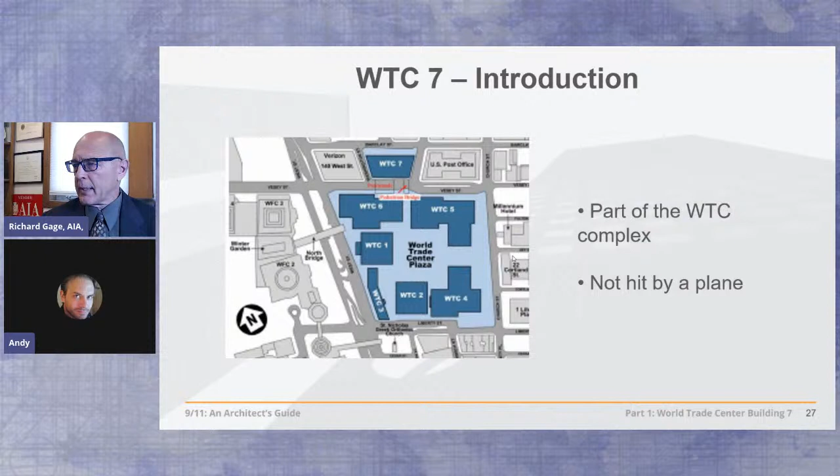Each floor was an acre in size. It's part of the World Trade Center complex officially, just outside the super block of the World Trade Center, as you see here. It was about 100 yards north of the North Tower, let's call that northeast. And you can see it still standing here even after the Twin Towers came down.

It did have some damage attributed by NIST to have no significant impact on the collapse of the building. We'll get into that, but let's take a look at the collapse of this building now, and then we'll get into its details.

The east penthouse collapses first, and that's the mechanical penthouse. In 6 seconds after that, the entire building comes straight down into its own footprint, as we'll see. So we're going to break this down.

First, let's look at the official story as promoted by NIST, the National Institute of Standards and Technology. Here's Shyam Sunder, the project leader: What we found was that uncontrolled building fires caused an extraordinary event. The collapse of World Trade Center 7 was primarily due to fire.

Fires like these that are actually few and small and scattered, as you can see. These are the only photographs and videos that we have of these fires, and they are problematic for the official story.

They show these fires in that area because that is their main hypothesis, as we'll see. But they also acknowledge, ironically, that fires didn't persist in any one location for more than 20 or 30 minutes, which is the conventional thinking of fire protection engineers, borne out by tests. That directly conflicts with their fire simulations.

Also conflicting with their simulations is the reality of the fires themselves, which are shown to be burned out on the 12th floor, the area of concern for NIST, by 3:50 p.m., more than an hour and a half before the collapse. So we have done our own fire simulation at AE911Truth, which shows the fire burning at 2 p.m. in the southeast section of the building.

Then moving over to the north section as shown by the photographs, and then moving on by 4 p.m. to the west end, also shown by the photographs. By 5 p.m., more than 20 minutes before the collapse, there is no fire on this floor at all, as shown in the photographs as well.

So this is only the beginning of the problems for NIST that they have yet to answer to.

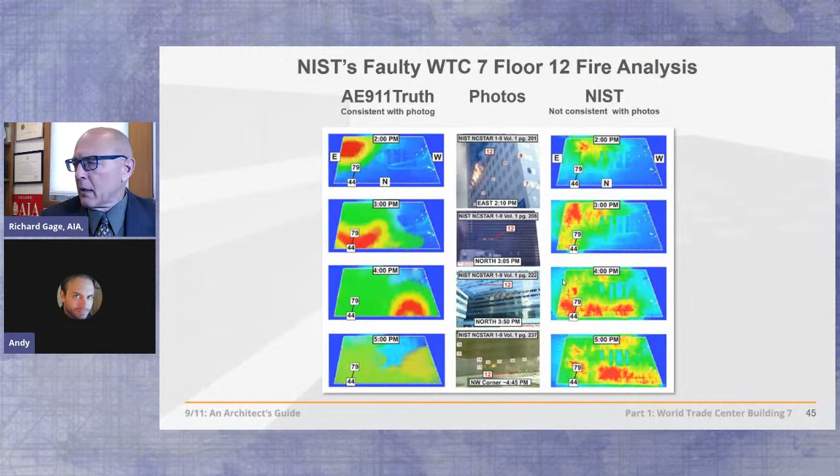Our study has identified thermal expansion as a new phenomenon that can cause the collapse of a structure. For the first time, we have shown that fire can induce a progressive collapse. So their theory, their hypothesis, is fire-induced progressive collapse.

And yet the fire causing thermal expansion was out over an hour and a half before the collapse. Thermal expansion requires expansion during the collapse, which requires fire during the collapse. This has been shown not to happen now.

But let's go on. You can see on the screen, the column at the very left is column 79, and that's the column that first buckles, causing the floors to come down, followed by a quick succession of failures of adjoining columns. Thermal expansion.

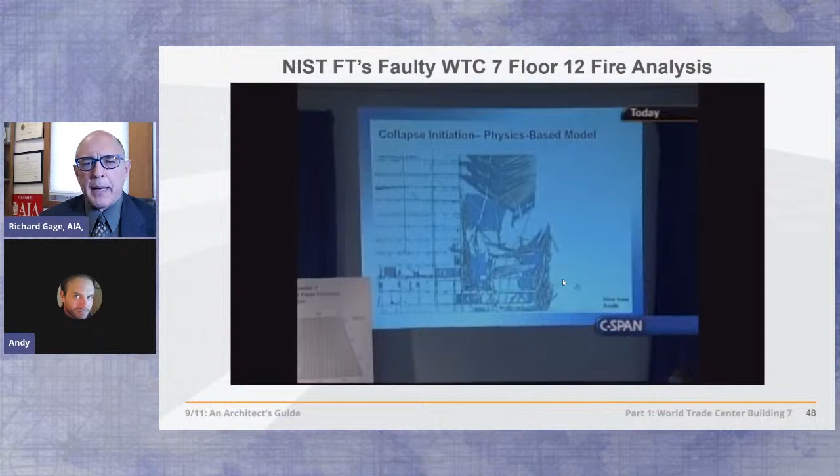Let's break this down. NIST is telling us that the fire raging up until the time of the collapse on floor 12 caused these long span beams to expand, pushing this girder off of its seat on column number 79, causing floor 13 to fall on 12, and 11, and so on for 9 floors.

There's no support for that column at all, and it buckles, and the entire inside of the building is caved in, and that instability then travels laterally within 6 seconds across the building, and the whole building is then gutted, and then the overall collapse happens.

That's the official story here, their collapse hypothesis in a nutshell. Let's break it down further, because there's still a number of problems associated with the rest of this story.

First of all, there's fireproofing on these columns. They're not going to be heating up. This is a 2-hour fire protection on these beams. There's only fire for 20 or 30 minutes, even as NIST acknowledges, in any one given area. That fire protection keeps the beams from heating up and failing.

So they're not going to be expanding. Even if they could, they couldn't push this girder off of its seat, because that girder is tied to the concrete floor slab up above with 30 shear studs that NIST conveniently omitted from their structural model so that they could get that girder to slide sideways.

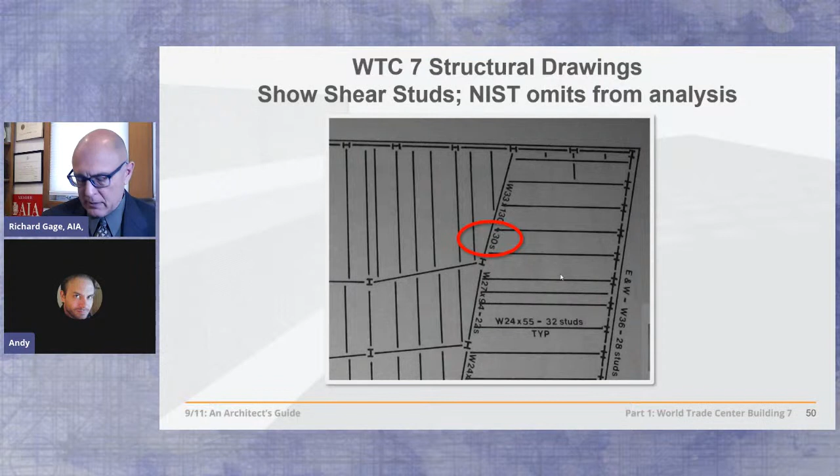But even if it could slide sideways, it could not have fallen off of this seat. Why not? Because the seat is 12 inches wide. The beam would have had to have slid all 12 inches off of that seat. But the beam could only slide 5 or 6 inches. That's all the expansion capability it has under the worst conditions.

By the way, NIST put all of the heat, 1400 degrees or so Fahrenheit, into those beams in a second and a half in their computer model, forcing it to expand, whereas naturally it would have sagged, as you'll see in an upcoming video.

But NIST had to conveniently ignore some key structural components, these 3/4 inch thick stiffeners, which are welded to the web, the eye of the I-beam, and the flange, the bottom and top parts, in this case, just the bottom. So that girder would have indeed had to have been pushed all 12 inches off of its seat. NIST says, oh no, it only had to be pushed halfway off of its seat, at which point the flange folded. Well, the flange couldn't have folded because of these stiffeners that are welded to it.

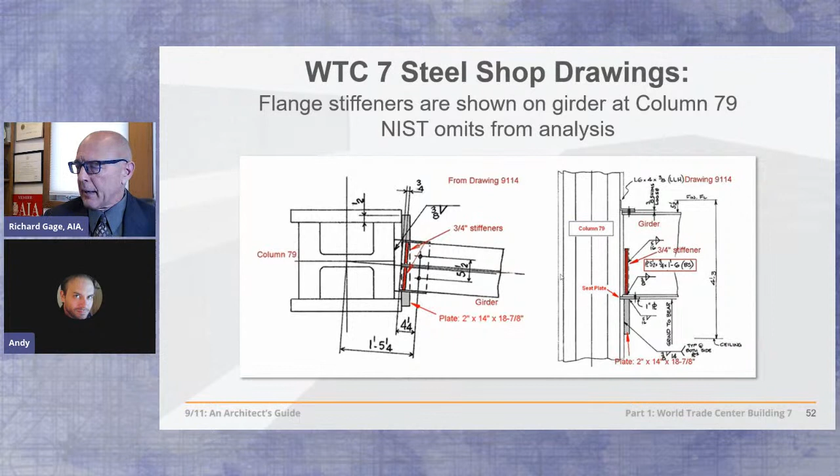This has been shown in many different ways by structural engineers. NIST says, oh, we didn't have to use those stiffeners because they're only there to prevent web crippling. Well, they also prevent the flange from folding. They conveniently omit that fact too.

But even if all of that could have happened and we would have had the 13th floor falling on the 12th, it couldn't have actually fallen on the 12th because there are 2 other massive girders connected to that column as well. They would have had to have been unseated as well. But let's say somehow they did, and this floor 13 did fall on 12. Could it have generated the necessary force to break the connection down below the 12th floor?

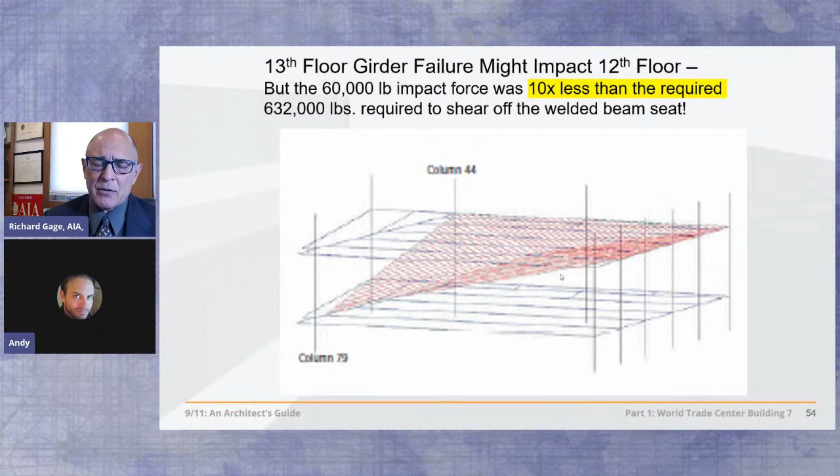No. In fact, it had 10 times less than the dynamic force required to break those connections down below. It would have required 632,000 pounds of impact force, but it only had 60,000 pounds. So it couldn't even have started the progressive collapse that NIST claims brought this building down.

So even if all of that could have happened, if you had an interior cascading collapse from the full height and full width of this building, don't you think those beams and columns, particularly the beams that frame into the exterior columns, having been welded in most of them in a moment-resisting steel frame building like this, would have pulled in on the exterior perimeter steel frame and caused massive breaking up of the granite panel cladding system that covered the entire exterior face, as well as the breaking of thousands and thousands of windows, crumpling it like a beer can. It would have happened that way.

But that's not what we saw in the video, and we'll take another look at it. In fact, here's the animation from NIST. Here's our structural model showing the building collapsing, which matches quite well with the video of the event.

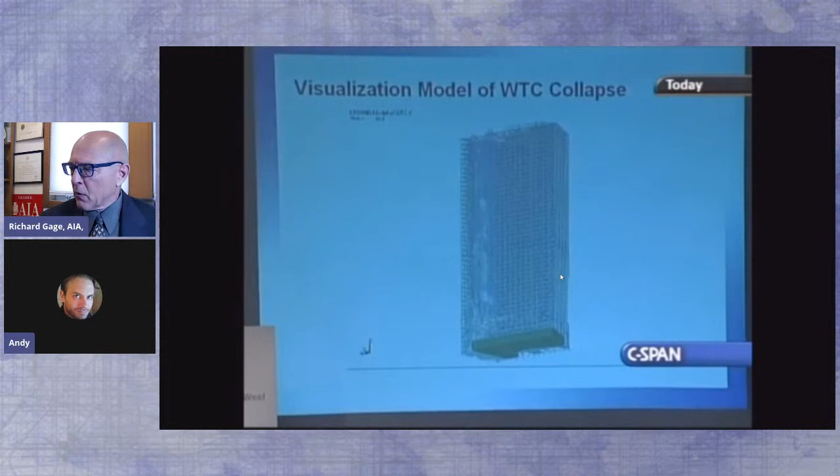Well, the instability starts from floor to ceiling to rooftop on the left side. They're breaking up 400 structural steel connections every second in their computer model. Steel buildings don't fall apart like that. This is like spraying a hose on a sandcastle. It just doesn't work like that in reality.

They can't even get their computer model, falsified enough, to look like the actual collapse of the building. So we submit a FOIA request, Freedom of Information Act, which you can do with agencies under the Data Quality Act, agencies that commit fraud like this. And they write back saying, well, we can't give you the computer input data, we're going to hide that, we're going to keep that to ourselves. Why? It might jeopardize public safety if we were to release that. Wait a minute, doesn't it jeopardize public safety to withhold that information from the architects and engineers that are tasked with ensuring the public safety?

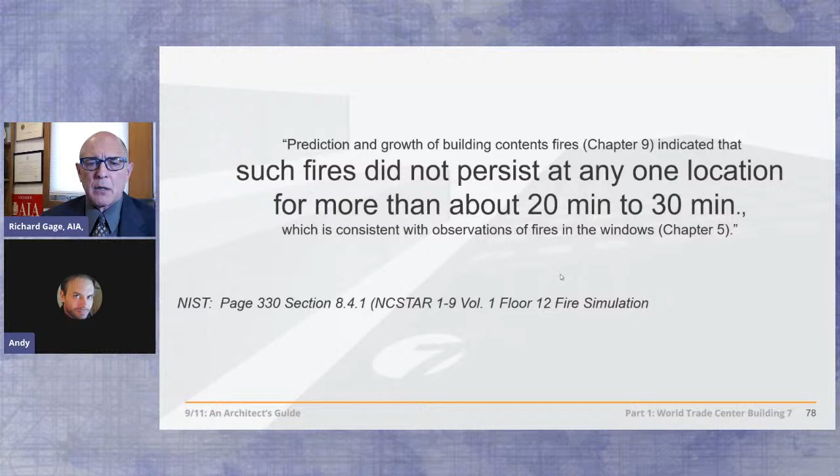Again, NIST acknowledges that the fires don't last in any particular location for more than that long. But say in skyscrapers, we have a problem here that we haven't lost one, as you'll see. But in wood frame buildings, because the structure itself is flammable, which is why we try to protect wood, but still it can catch on fire, it would fall over in stages to the path of least resistance, following the law of entropy, increasing chaos, disintegration.

So, but what about steel frame buildings? Well, we have a test. In fact, the largest test of its kind in the UK in 1995. Let's see what happens here in this 8-story building that they built in order to try to burn it down.

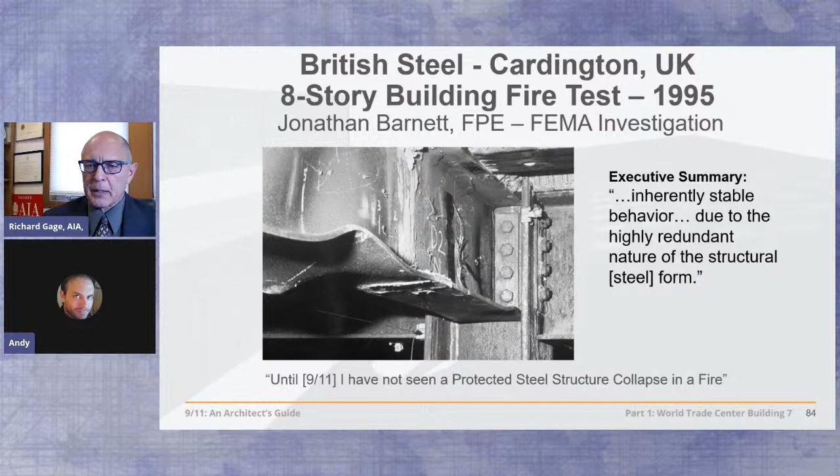So what about other skyscrapers that have had large, long-lasting, and very hot fires? May 4th, 1988, the First Interstate Bank, a 62-story building in Los Angeles, California, suffered a 3.5-hour fire which burned across 5 floors and caused an estimated $200 million of damage. It did not collapse. February 23rd, 1991, the One Meridian Plaza, a 38-story building in Philadelphia, suffered an 18-hour fire which burned across 8 floors. The fire caused an estimated $100 million worth of damage and 3 firefighters died fighting it. It was later described by officials as the most significant fire of the century.

It did not collapse. October 17th, 2004, the East Tower of the Parque Central complex in Caracas, Venezuela suffered a 17-hour fire which spread across 26 of its 56 floors. It did not collapse. August 18th, 2007, a fire broke out on the 17th floor of the Deutsche Bank building in New York, a building undergoing deconstruction after being heavily damaged by debris from the South Tower on 9/11.

Originally 41 stories in height, it had been reduced to 26 at the time of the fire, which lasted 7 hours and affected a total of 10 floors. 2 firefighters died of smoke inhalation.

It did not collapse. On 9/11 itself, 5 World Trade Center, a 9-story building east of the North Tower, was engulfed in flames after sustaining heavy damage from falling debris. A number of partial collapses occurred, but the overall structure remained standing.

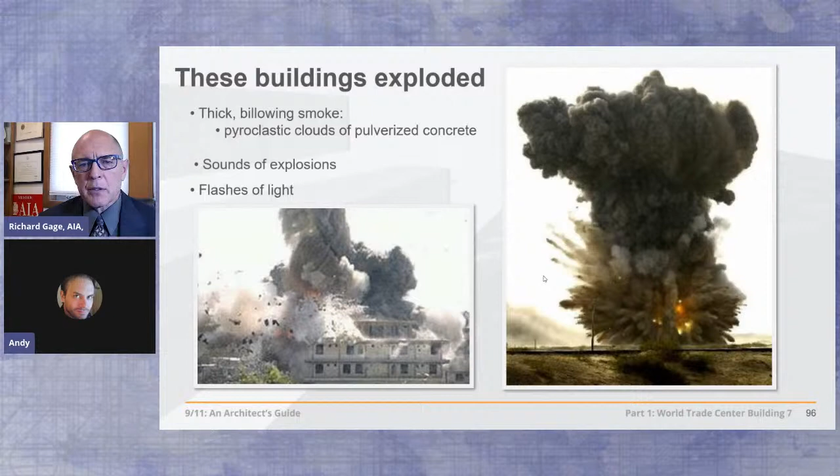Now, explosions can be harnessed quite effectively to bring down mid-rise and high-rise buildings, as they have for many decades. This is a process called controlled demolition, which only a handful of companies in the United States are even capable of executing. They place shaped cutter charges at key columns and beams throughout the building, and then detonate them in a very precise order, tuned to the second, or fraction of a second.

So there's a set of features associated with these controlled demolitions, which we just want to look at real quick. What are they? We have a sudden onset of destruction. That's typical and very key, usually near the base of the structure.

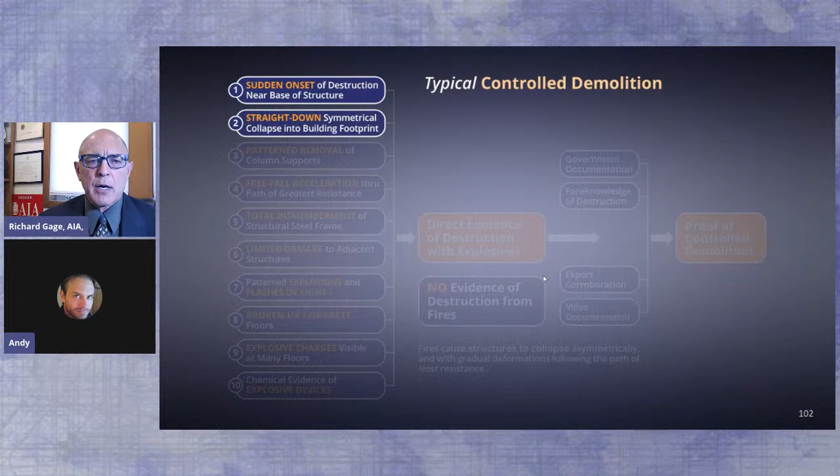We have a straight down symmetrical collapse into the building's footprint. That's the idea, to keep the destruction from hurting other buildings.

This symmetry is a result of the patterned removal of column supports, which is evident often in the videos, and results also in a near free fall acceleration straight down through the path of greatest resistance. The building doesn't tip over, but how does that happen? We'll be looking at that very carefully.

Resulting also in the total dismemberment of the steel frame. One column from another is severed. Limited damage to adjacent structures, and of course, that's one of the goals of controlled demolition.

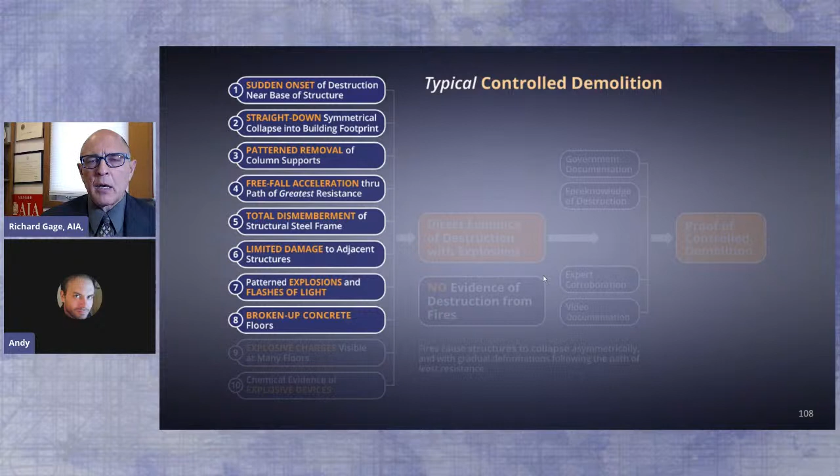Feature number 7, patterned explosions and flashes of light heard and seen by witnesses. The concrete floors are broken up by the explosives. You don't want to have to go back and jackhammer those floors, so they do that work with the explosives.

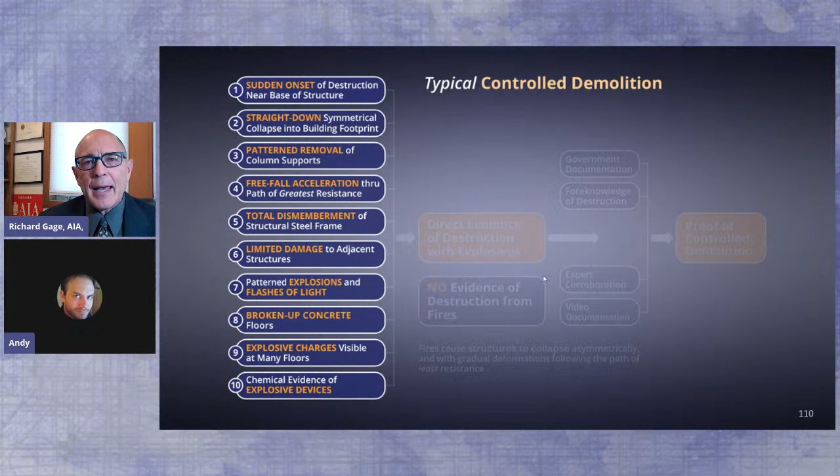So there's explosive charges visible at many of the floors, isolated explosive ejections called squibs in the controlled demolition industry, with chemical evidence of explosive devices left behind in the residue. If you have these features, you know you have direct evidence of explosives.

Fire doesn't create these features, any of them, let alone all of them. Fires cause structures to collapse asymmetrically with gradual deformations following the path of least resistance. So this can be a very helpful body of evidence.

Also, government documentation—you don't just go and bring down a building at will, you have to have approval. So governments tend to know about it, and there's foreknowledge in advance of the destruction of these towers.

Experts agree, looking at the videos, for instance, that yeah, that's a controlled demolition. They know a controlled demolition from a natural collapse. With video documentation, all this can be proof of controlled demolition.

A body of proof that we want to apply now to Building 7, beginning with, is there a sudden onset of destruction near the base of the structure?

Let's listen to Dan Rather narrate his view of what happened here. And what you're seeing are live shots. Now we're going to show you a videotape of the collapse itself. Describe that. Now we go to videotape, the collapse of this building.

It's amazing, incredible, pick your word. For the third time today, it's reminiscent of those pictures we've all seen too much on television before, when a building was deliberately destroyed by well-placed dynamite to knock it down.

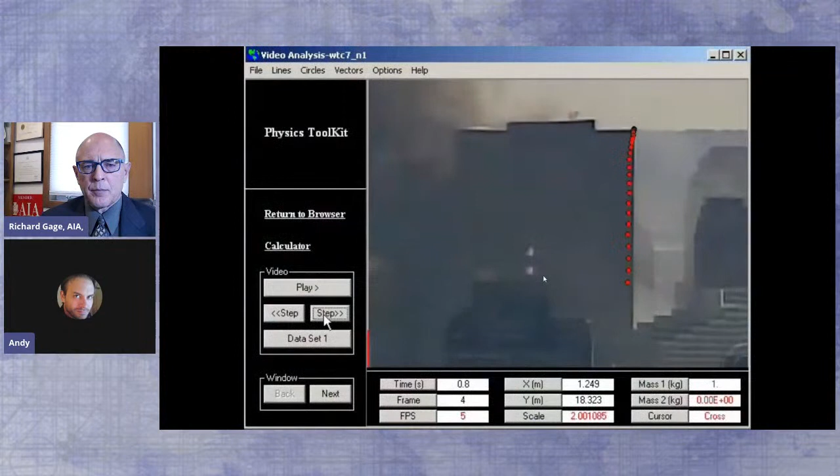How fast is the building coming down? Let's listen to physics teacher David Chandler. Just by watching it, anybody can see that Building 7 fell close to free fall. To measure it, I used software to track the corner of the building and compute a graph of downward velocity as a function of time.

The graph had a long, straight section indicating constant acceleration. Measuring the slope, I found the acceleration to be within 1% of the acceleration of gravity for the first 2.5 seconds. In other words, the building fell through its own structure with zero resistance.

Pardon me? The building fell through its own structure with zero resistance? How does that happen? This building had 40,000 tons of structural steel in its structural system, and that is intended to keep it from going anywhere. NIST is telling us that the building below it ceased to exist for the first few seconds of the collapse of the building.

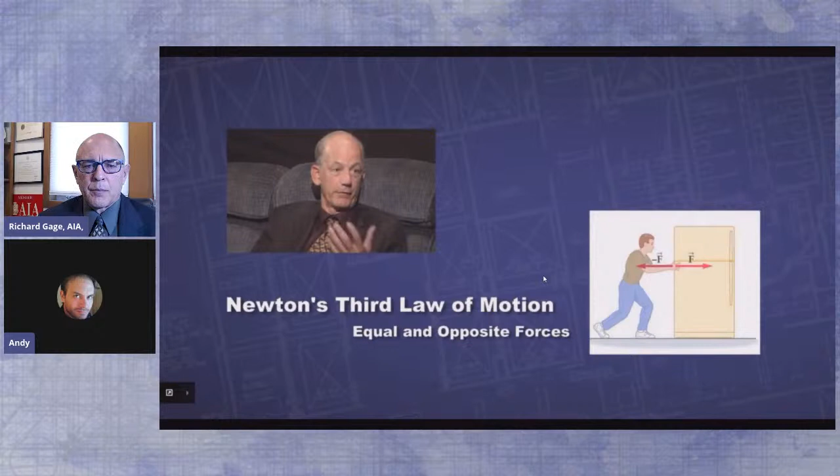Things in physics just don't cease to exist and cease to resist the forces on them. The building didn't disappear, so it can't fall at free-fall speed for 100 feet. That's impossible, a violation of Newton's law that for every action there's an equal and opposite reaction. One reaction is the resistance of the columns, which continue to push up even after buckling, the plastic stage of a column, retaining at least 25% of its strength. With 80 columns theoretically buckling at once, that's a lot of resistance, so the building can't fall as fast as a bowling ball and still buckle all those columns, or even one of them.

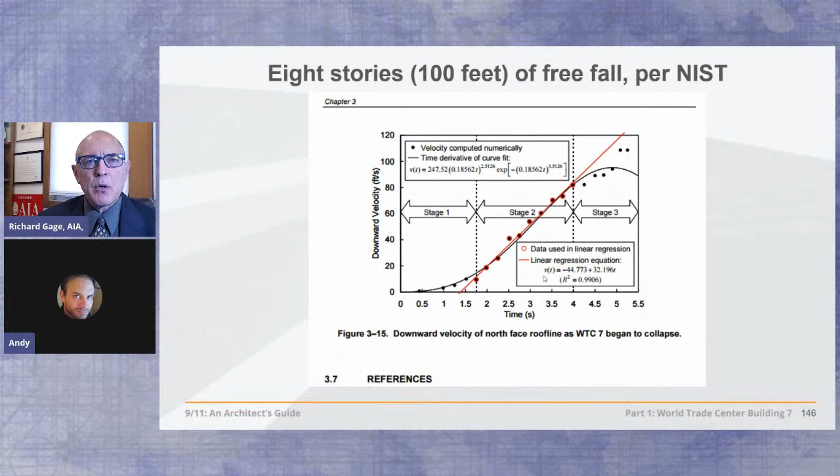NIST finally admits this because they were challenged publicly by members of AE 9/11 Truth at a press conference. In their final report, they acknowledge that for a third of the building's fall, it came down at free fall. But they don't acknowledge the implication: that these columns all had to have been removed in order to achieve free fall.

Is there total dismemberment of the structural steel frame? Well, yeah. Here's a 47-story moment-resisting steel frame structure reduced to a pile 4 to 6 stories tall. All the columns and beams had to have been severed one from another, save for the minor substructure supporting the cladding wall, which makes it look like it's falling intact. But that's just 12-gauge rolled steel or some similar minor substructure.

Remember, in buildings that collapse naturally, we don't see severing of columns and beams one from another. They don't fall like a house of cards.

Is there limited damage to adjacent structures? Well, yeah, there's some damage to the post office and the Verizon building nearby, but the center of the building ends up in the center of the footprint of the building in the aftermath.

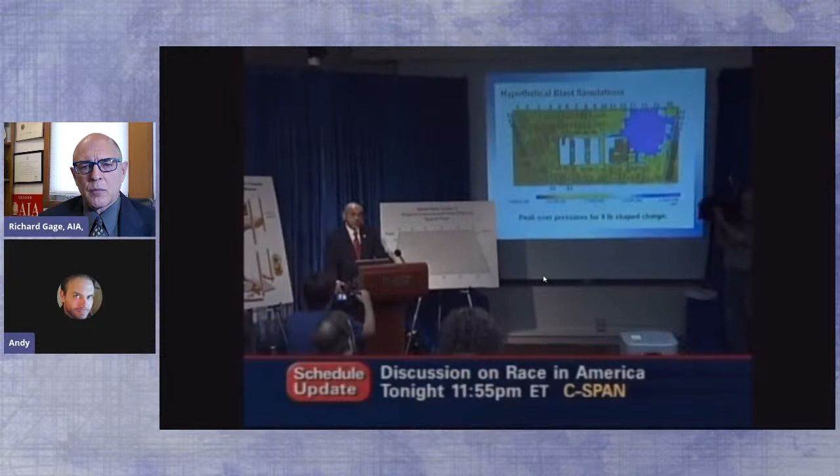Are there sounds of explosions heard by witnesses? Let's first go to a statement by Shyam Sunder of NIST: 'We did not find any evidence that explosives were used in the collapse of Building 7. We ran detailed computer simulations of blast scenarios. This size blast would have produced an incredibly loud sound that was not recorded on videos of the collapse, nor reported by witnesses.'

Well, let's see if that's true. Here's some witnesses of explosions: 'We were watching the building because it was on fire. The bottom floors were on fire, and we heard a sound like a clap of thunder. We turned around and were shocked to see what looked like a shockwave ripping through the building, and the windows all busted out. It was horrifying. Then about a second later the bottom floor caves out, and the building followed after that, crashing down all the way to the ground.'

A shockwave ripping through the building, windows busting out, the sound of a clap of thunder. Did NIST talk to that gentleman interviewed on 1010 WINS Radio in New York? Or did they talk to this gentleman, Kevin McPadden, former Air Force medic, who was nearby Building 7?

And then it was like another 2-3 seconds, you heard explosions, like boom, a distinct sound. It's not like when floors are dropping and collapsing in compression, like boom, boom, boom, boom. This was boom, and you felt a rumble in the ground, like you wanted to grab onto something. That, to me, I knew that was an explosion. There was no doubt in my mind.

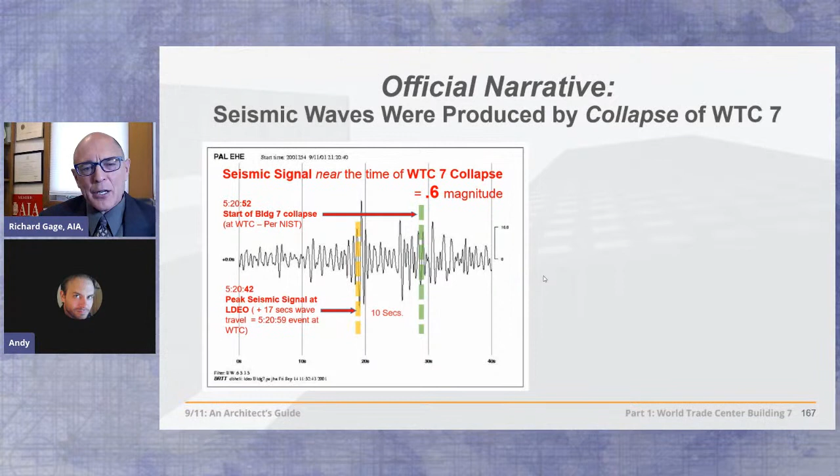Well, they actually did, and it's a fascinating discussion, and I'm going to walk you through it. There was a 0.6 magnitude event near the time of the Building 7 collapse, which NIST claims is a result of the Building 7 collapse. It's a reasonable assumption, but let's look at the data. The peak seismic signal occurs at 5:20 and 42 seconds that evening, but the start of the collapse doesn't happen until 10 seconds later. So how can the collapse cause the seismic signal?

Well, NIST has an answer to this: a seismic signal approximately 10 seconds prior to the onset of collapse was likely due to the falling of debris from the interior of the collapse.

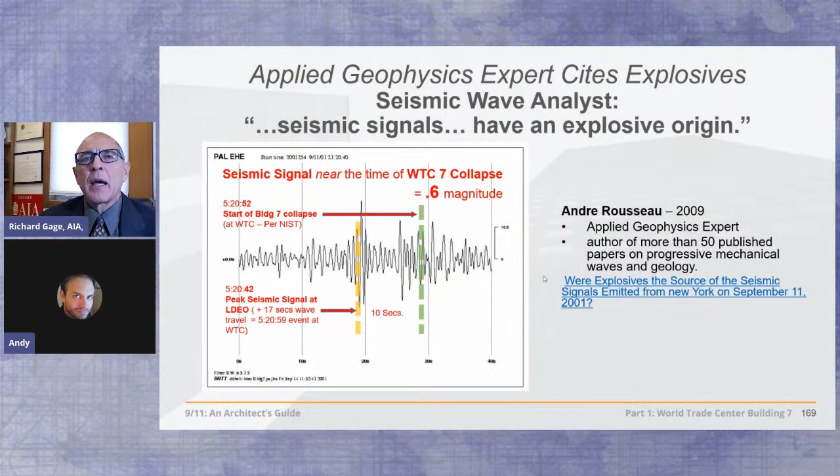Well, wait a minute. First of all, we saw that the interior structure was supporting things, you can see it here, the main penthouse up to 6 seconds after the east mechanical penthouse falls. But then the entire interior structure falls, which is what they do in controlled demolition. They take out the interior structure a half a second or so before the exterior. That pulls the exterior structure in, on, and over the interior to avoid the building tipping over. So that can't possibly be the cause of the seismic signal because it only begins to happen just half a second prior to the overall collapse.

So what does NIST do? Hold on a second. So we go to Andre Rousseau, who in 2009, an applied geophysics expert, writes another paper. He's written 50 published papers on progressive mechanical waves and geology.

He says the bell-like forms point to an impulsive source of energy, not percussion on the ground due to the fall of debris. He says seismic waves of these low frequencies are only created by brief impulses — these undeniably have an explosive origin. So this peer-reviewed paper stands uncontested.

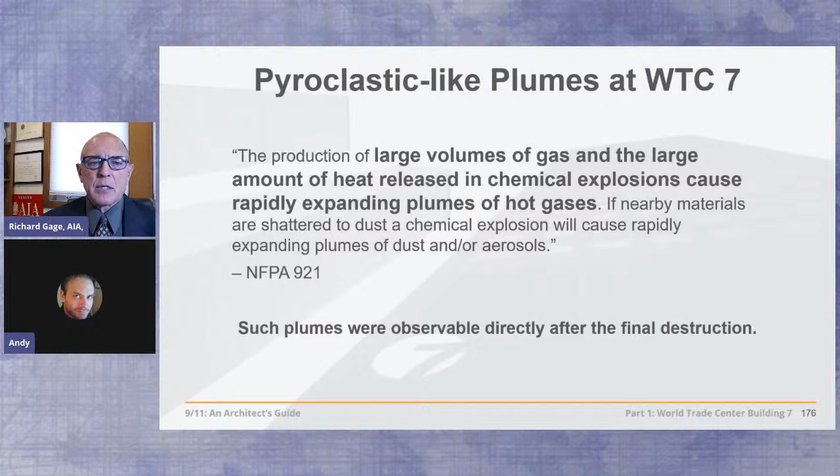Let's look at the extreme heat produced here, because we have some real problems with the official story when we go to the National Fire Protection Association Guide 921 for fire and explosion investigation. This is the accepted authority in this country and many others. Look for the large volume of gas and large amount of heat released in chemical explosions, causing rapidly expanding plumes of hot gases. Well, these plumes were observable directly after the destruction of Building 7, racing away in every direction at 35 miles an hour. We have these incredible expanding cauliflower-shaped plumes, which are the result of an incredible amount of heat.

The heat from the fires in these buildings? No, that heat and those flames were extinguished, most in all likelihood, as a result of the mechanical action of the floors compressing upon each other. No, we're looking for a whole lot more heat than that.

Something on the order of this, and guess what, we find it. Let's go right into it. The NASA air flights, thermal imaging, find incredible heat on the surface of Building 7, amounting to about 1,340 degrees after the collapse. Now, the collapse has happened, the fires were extinguished, and yet on the surface we have temperatures associated with the very hottest office fires, 1,340 degrees Fahrenheit. So what's happening here?

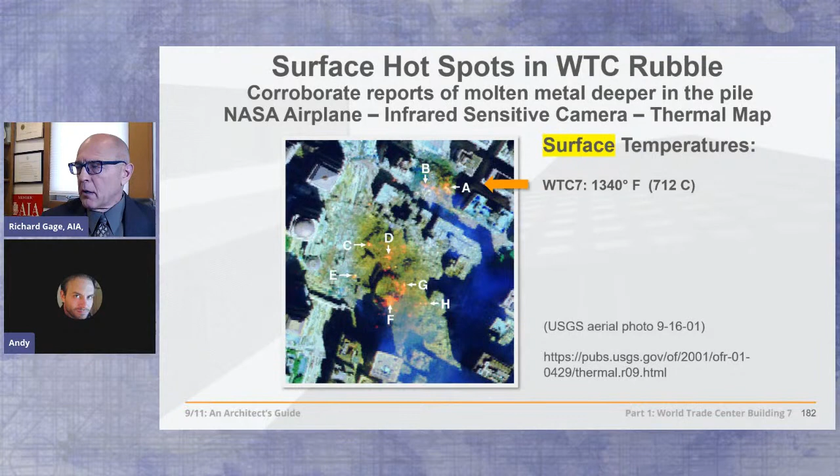Well, surely something else is going on, which we'll show you evidence for, that's much hotter deep down in the pile, that by the time it rises to the surface has cooled off to 1,340 degrees.

These hot spots are not visible as flames on the surface whatsoever. The fire's gone. Let's listen to Abolhassan Astaneh-Asl, structural engineer who had a National Science Foundation grant to study the steel.

I saw melting of girders in the World Trade Center.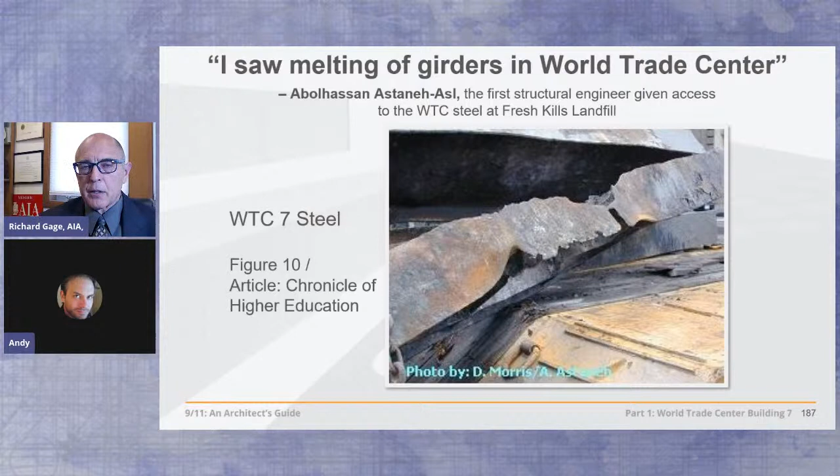Now, guess what? It takes 2,800 degrees Fahrenheit to melt steel. The fires weren't even a quarter of those temperatures. So what got to be so hot that it could melt steel?

Even as documented by FEMA report author Jonathan Barnett, steel members in the debris pile appear to have been partly evaporated in extraordinarily high temperatures. There's a problem here. It takes 4,000 degrees Fahrenheit to evaporate steel. What could have done that?

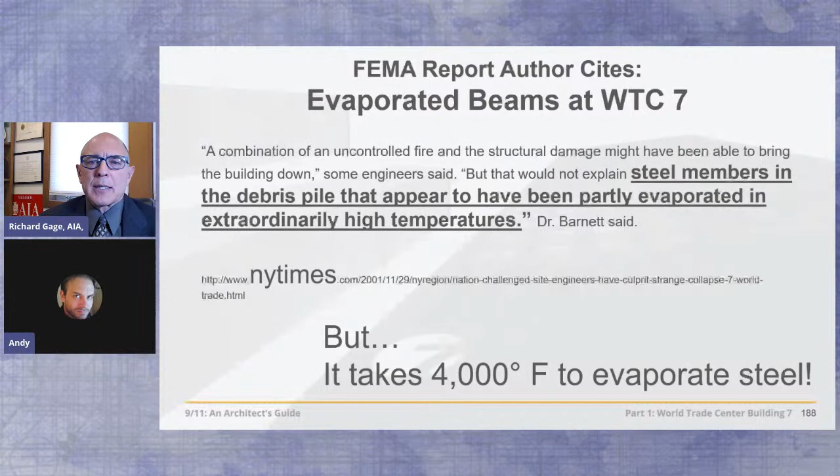Well, we get a clue actually in the FEMA report, which came out before the NIST report, in their Appendix C, which is a metallurgical examination of the 2002 Building Performance Assessment Team report. What do they document? Never before observed in building fires, eutectic reactions caused intergranular melting capable of turning a solid steel girder into Swiss cheese, like they show here.

Rapid oxidation, sulfidation, liquid iron—that's molten iron, that's 2,800 degrees. Sulfur formed during this hot corrosion attack on the steel.

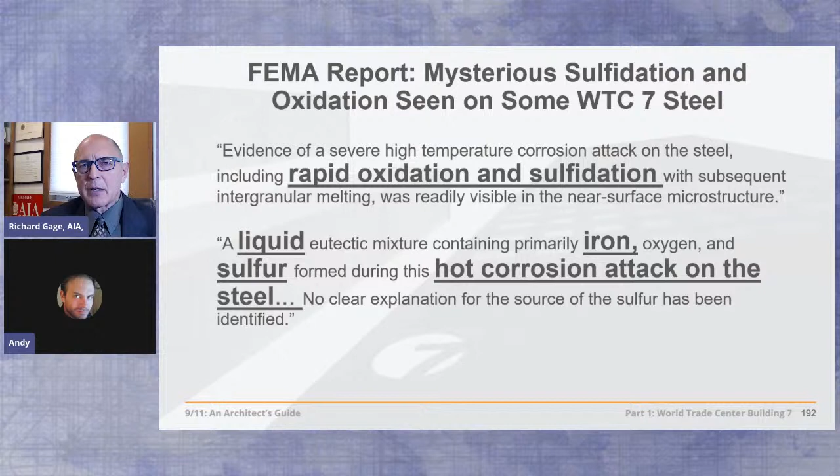Perhaps the deepest mystery uncovered in the investigation, says the New York Times. But it was completely eliminated when NIST took over the FEMA report and put out their own report 7 years after 9/11.

Claiming that no steel could be tested, again and again and again. Couldn't test any steel. No metallography could be carried out because no steel was recovered.

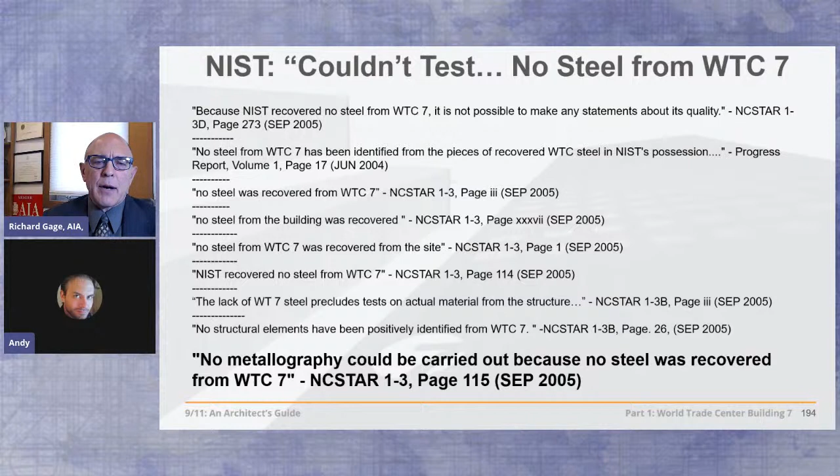And yet, here is John Gross, the co-project leader of the NIST report, on the pile, cutting off the very piece of steel provided to FEMA for their Appendix C metallurgical investigation, in which they documented liquid molten iron invading the ends of the steel beams, like this partially evaporated steel beam. His shadow is all over the evidence.

And yet they have no explanation as to how hydrocarbons could burn so hot. Because steel had definitely melted. We've just proven it. FEMA proved it.

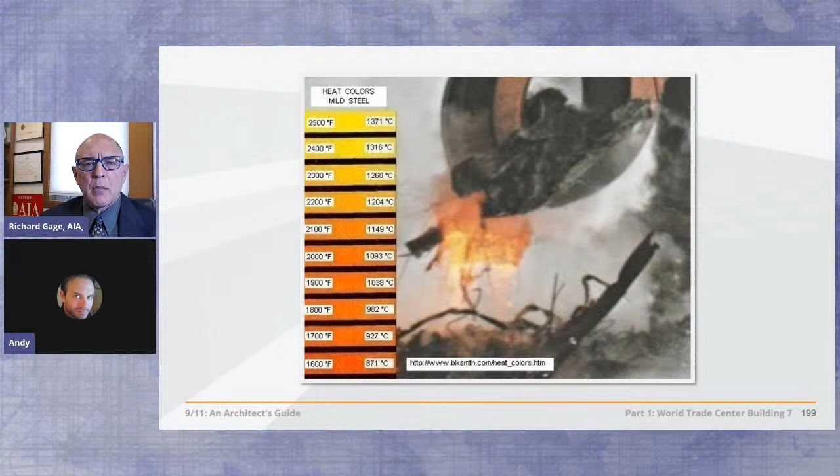In fact, you can see by the color of the molten material pouring out of the debris held in the jaws of this crab claw excavator that it's 2,500 degrees—liquid molten iron, as it turns out to be. They call it molten steel.

But what could cause steel or iron to melt? We have some suspecting that fires were 1,200 degrees Fahrenheit. Steel doesn't melt until really 2,800 degrees Fahrenheit. What could possibly cause this?

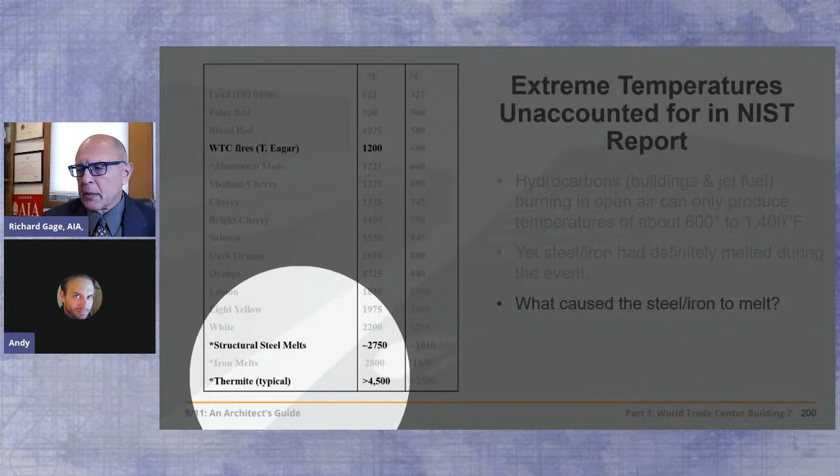We'll be looking at one suspect objectively, because we don't have financial or political obligations that might sway our objective opinion in the use of the scientific method. Let's look at the evidence of thermite. Could it have produced all of that molten iron?

What is thermite anyway? An incendiary used by the military, thermite is a compound of iron oxide and aluminum, which when ignited sustains an extreme heat reaction, creating molten iron. In just 2 seconds, thermite can reach temperatures over 4,500 degrees Fahrenheit, quite enough to liquefy steel.

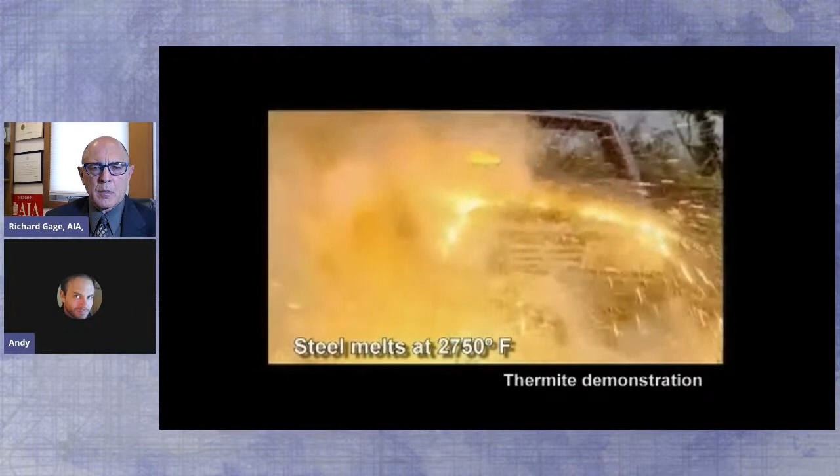We know that open-air fires cannot burn hot enough to melt steel, but metal had melted at the base of the towers.

Appendix C of the FEMA report describes sulfur residues on the World Trade Center steel. The New York Times called this the deepest mystery of all. Sulfur significantly lowers the melting point of iron, and iron oxide and iron sulfide had formed on the surface of the structural steel. Sulfur used with thermite is called thermate, producing even faster results.

Well, maybe we're getting somewhere here, because if thermate were used, it would explain three things. One, the incredible temperatures—4,000 degrees—issuing what? Molten iron, not molten steel, but molten iron, which we're going to be seeing a lot of evidence for.

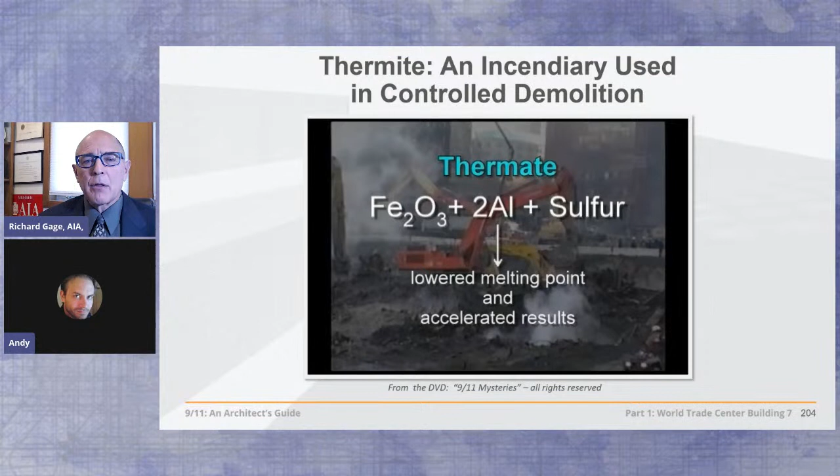It would explain the presence of sulfur. Sulfur is added to thermite to become thermate, much more effective at cutting through steel. So we're on to something here. Let's follow it up with a suggestion from the National Fire Protection Association: look for unusual residues that could arise from thermite or other pyrotechnic materials.

NIST claims they found no corroborating evidence to suggest that explosives were used. Later, they acknowledge in writing that NIST did not test for the presence of explosive residues. You can't find what you will not look for. This is disingenuous at best, but others looked for it.

It wasn't that hard to find. Steven Jones, nuclear physicist formerly from Brigham Young University, looked for it. He was sent samples from this particular piece of steel from the sculpture. His analysis finds that this isn't the kind of cut that thermal lances and oxyacetylene torches make in steel. That looks like this jagged pattern, which is a real problem, because that's not how the iron workers were cutting through steel. Something else happened there.

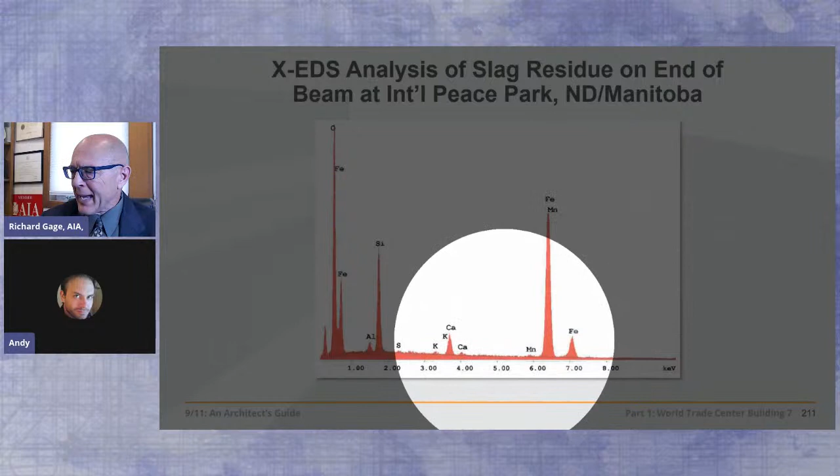Something else does this too. We have a test of the slag from this beam, and what do we find? We find iron, previously molten iron, manganese, sulfur, and aluminum. The ingredients of thermite are iron and aluminum. Usually the aluminum is burned up into aluminum oxide gas, but here's the residue of some incomplete ignition, apparently.

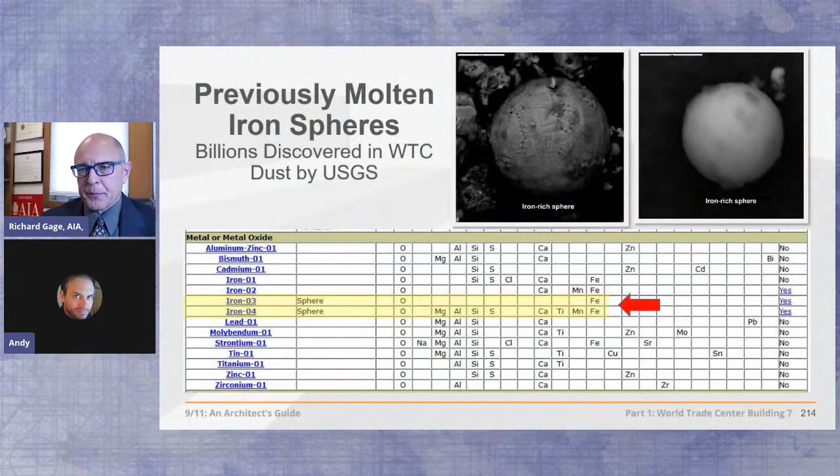The USGS, the U.S. Geological Survey, does a very detailed study of this dust. In 2005 or 2006, they reported in their particle atlas that they find billions of previously molten iron microspheres. In fact, 6% of some of these samples are previously molten iron microspheres, up to about 4 tons by extrapolation of all the samples they did find and study.

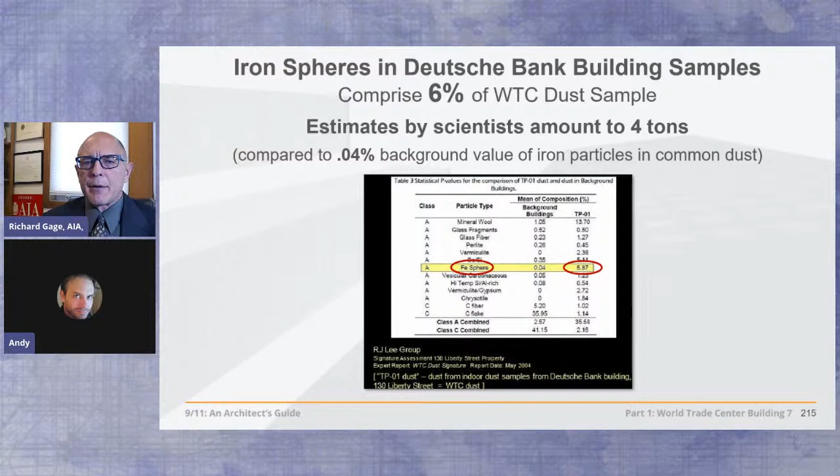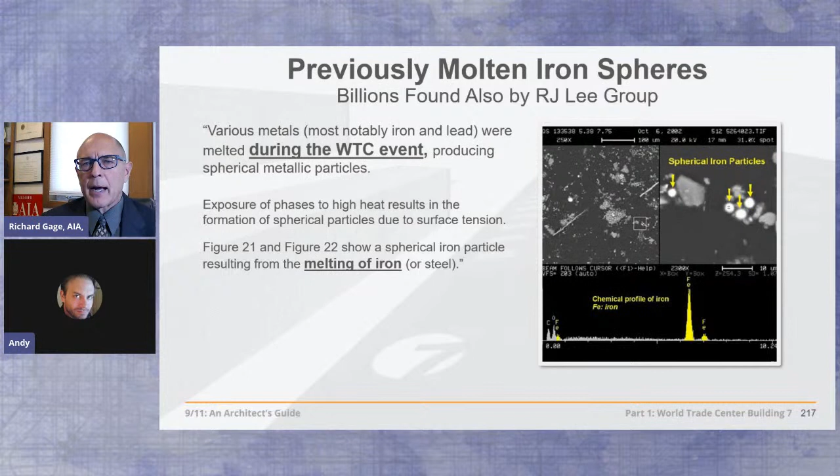Compared to iron dust particles, which can be in common office building dust but are not spherical, we're talking about 150 times more plentiful. R.J. Lee Group, an environmental consulting firm also doing studies on the dust, says they find these too and document them. They're formed during the event, not before by the welders putting the site together, not afterward by the iron workers taking it apart, but during the event.

There are so many of them that they're used to distinguish World Trade Center dust from common office building dust. In other words, it's not even World Trade Center dust unless it has these previously molten iron microspheres in it. And we don't even know where they came from. They don't speculate where they might have come from. It's a complete mystery to them.

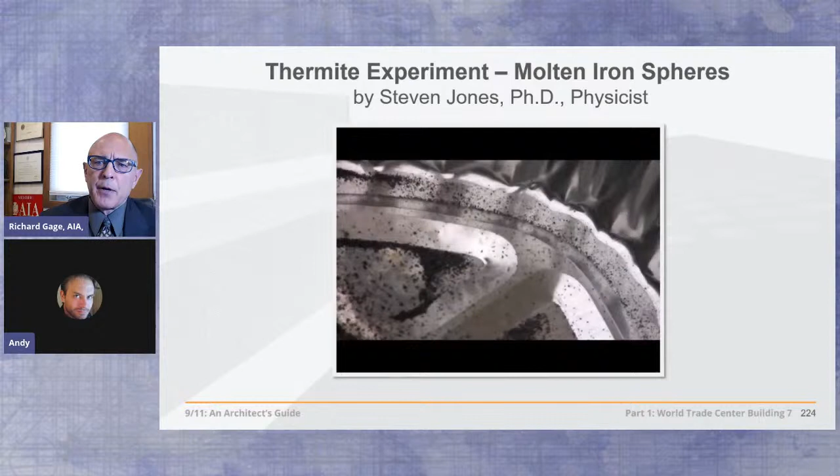But it's not a mystery to those who do thermite experiments, like Steven Jones in his own backyard. A controlled experiment with a very small amount of thermite produces an enormous amount of molten iron spheres, which cool and fall and become spheres. How do they become spheres? Because the surface tension of any aerosolized liquid forms itself into spheres, like raindrops. That's how they used to make bullets, dropping lead from the top of a high tower.

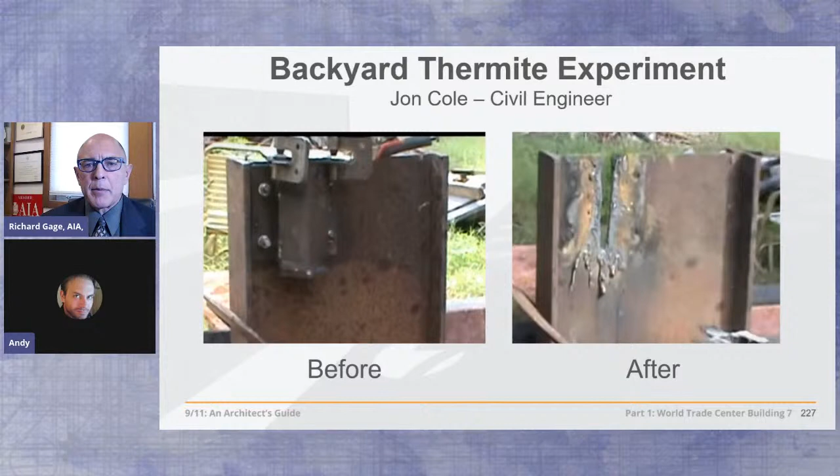But there are much more effective ways to do this with patented inventions. For instance, this thermite-based shaped cutter charge can cut through steel of much greater thicknesses, which we had in the World Trade Center, 4-inch slabs of steel at the base of that structure, 3 of them put together, 52 inches by 22 inches at the bottom, projecting liquid molten iron in hundreds of milliseconds, much more effective at cutting through these thicker sections of steel.

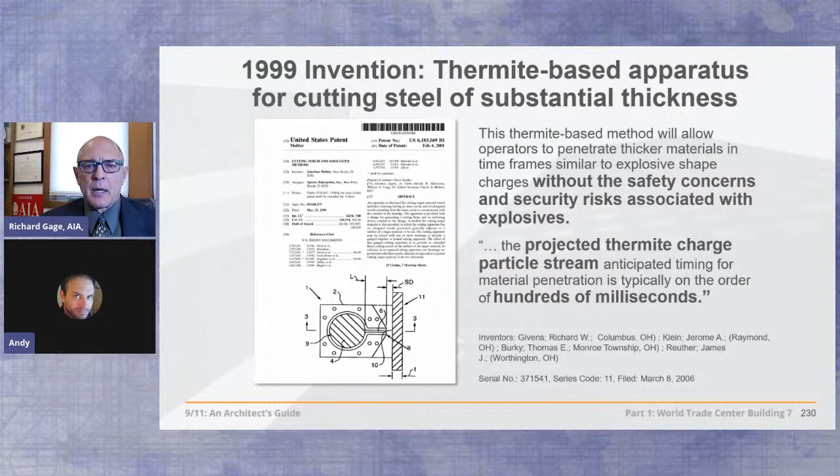Some of these devices, like this one, have a casing made of consumable consolidated thermite, meaning it would burn up too, leaving nothing behind but pools of molten iron, which we will see abundant evidence for in part 3 of this series. But for now, what else was found in the World Trade Center dust? A team of 8 international scientists led by Niels Harrit in Copenhagen sent independent samples for analysis.

They collected independently samples that were sent from various people who heard of their work, like this apartment dweller, Janette MacKinlay, who was an artist, and she collected this dust because it caved in her windows through the incredible explosions we're going to be looking at next week in this series in the Twin Towers, and filled her office and her apartment full of this dust. She died, unfortunately, having been breathing and working with it in her therapy as an artist. Very tragic. But one of these dust samples was hers that they documented.

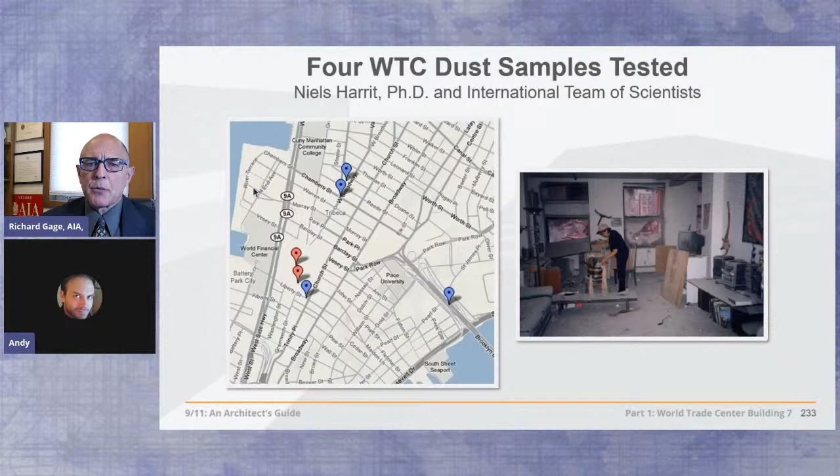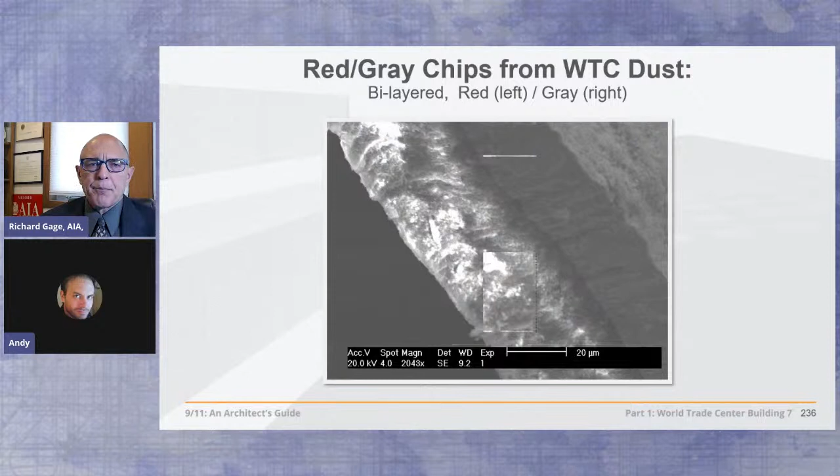They were very curious because they find these red-gray chips, red on one side, gray on the other. They thought they were paint at first, but they're attracted by a magnet, so they have a high iron content. They get real curious and zoom into the red layer and do analysis of it with X-ray energy dispersive spectroscopy and find iron and aluminum, the key ingredients of unignited thermite. And we'll get to the oxygen, silica, and carbon in a moment.

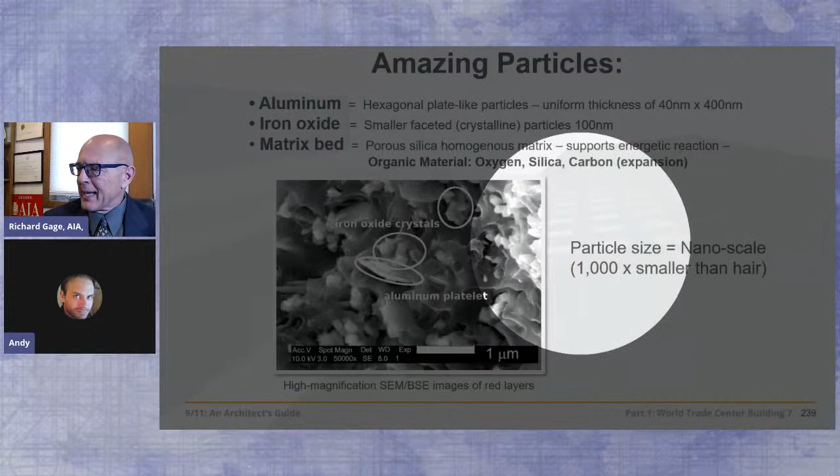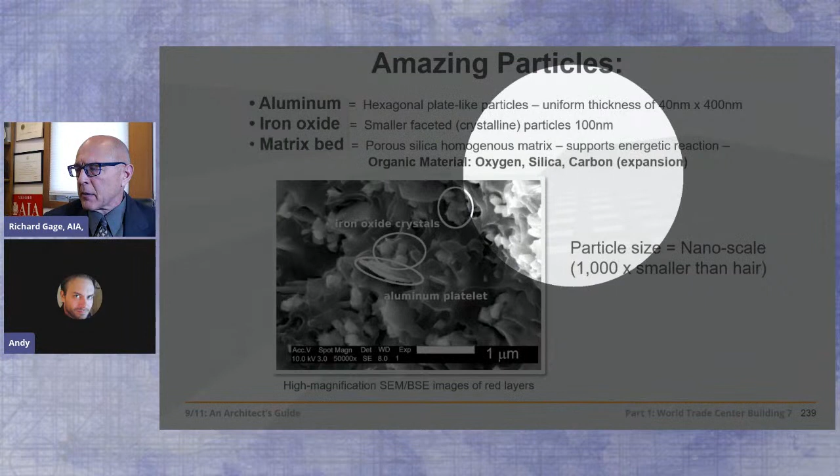So what are the ingredients of thermite doing in all of these red-gray chips? They get real curious, zoom in 50,000 times with a electron microscope and find nano-sized particles of iron oxide crystals, the key ingredient of thermite, about three-quarters of which, and one-quarter of which is composed of aluminum platelets. These are at the nanoscale, 1,000 times smaller than the diameter of a human hair. They're set in a matrix of oxygen, silica, carbon. This is organic material which expands.

This is how TNT works, expanding into incredible quantities of gas very fast. Knocks things over. Normally, incendiaries like thermite burn with high temperatures, 4,000 degrees. So here, something else is going on. Something which, interestingly, when put in a differential scanning calorimeter, basically a heater, at about 788 degrees Fahrenheit, they ignite, producing a lot more energy, which can be measured. That's the purpose of this device, proving that it's an exothermic reaction.

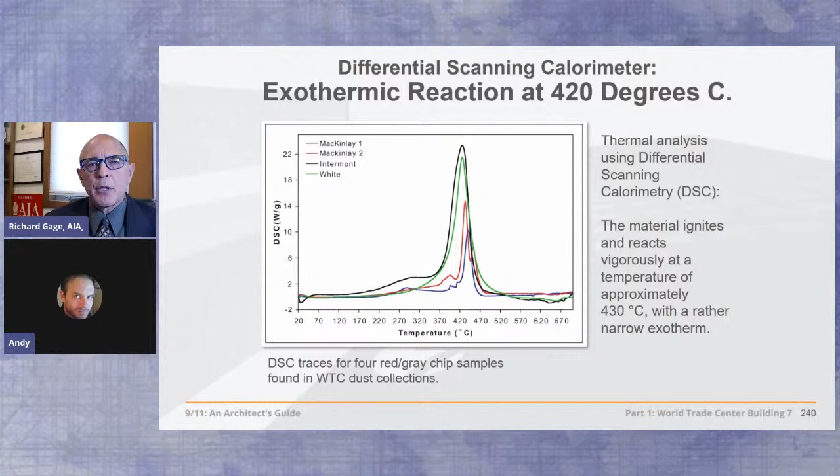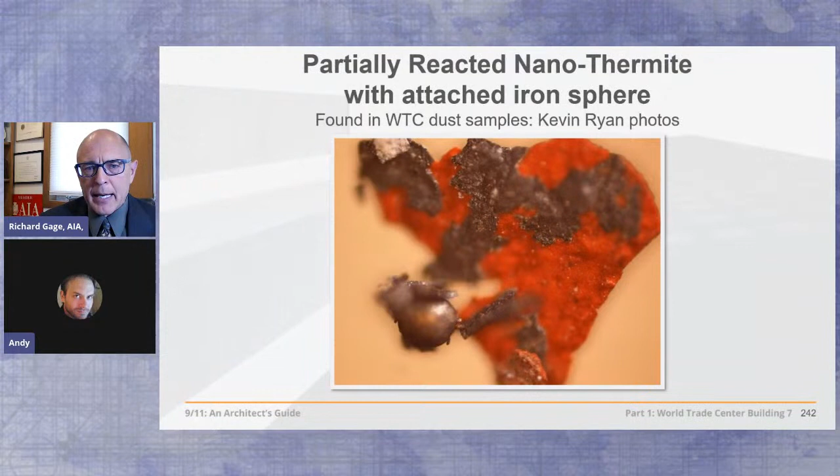And what do they produce when they ignite? They produce molten iron microspheres with the same chemical signature as the molten iron microspheres found in the World Trade Center dust by R.J. Lee and USGS and so forth. So we know where those molten iron microspheres came from. They came from these red-gray chips. As if we didn't know, they're found attached to partially ignited red-gray chips, as you see here and here.

So you see, this is a very sophisticated process documented by Lawrence Livermore Lab called super thermite, to increase the weapon capability of our arms industry. So it's not made in a cave in Afghanistan. It's made only in the most advanced defense contracting laboratories.

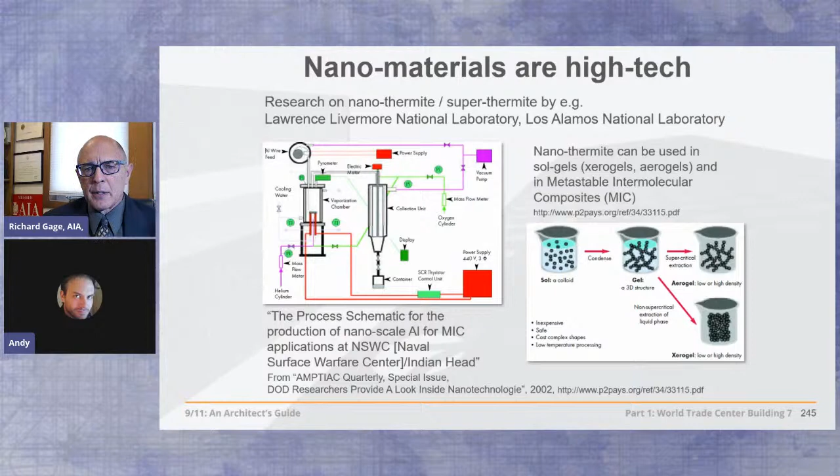And so we've got a source, if we can get it, of experimentally reproducible, self-corroborating set of evidence that can be used to bring the perpetrators of 9/11, the real perpetrators, to justice, if we can get it into a court of law, and we have been trying, as we will show you. This is all documented in a 25-page peer-reviewed paper in the Bentham Open Chemical Physics Journal. It stands uncontested. People will raise their hand and say, oh, that's just paint. No, nobody has submitted their own peer-reviewed paper documenting the analysis of these red-gray chips to prove anything else other than what has been proven in this document.

So what we've been looking at here with regard to Building 7 so far is key characteristic features of controlled demolition. A fire doesn't create these features, any of them, let alone all of them. Why not? Well, let's look at it real quick.

Modern steel reinforced high-rises that are fireproofed have never collapsed due to an uncontrolled fire. Why? Well, one reason is steel conducts that heat away from the source, so it never gets to its 1200 degree Fahrenheit temperature, at which point steel can begin to fail, begin to bend, and loses half of its strength. But to keep that from happening anyway, we go ahead and fireproof it with 2 and 3 hour fire protection on the beams and the columns.

And that's what Building 7 was protected with, and the Twin Towers. And to keep fire from ever becoming a problem, we of course build our high rises out of non-combustible materials, and we don't allow the tenants to bring in large fuel loads. We also require sprinklers to be installed, and sprinklers in the case of Building 7 were said to have been put in test mode the morning of 9/11, which is very interesting. Nevertheless, they were non-operational.

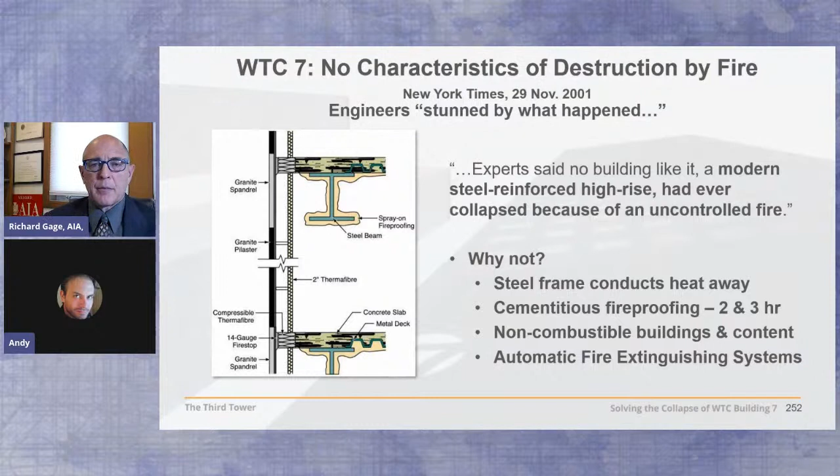They also said that when the towers collapsed, that damaged the fire sprinkler main, the water main. So that's arguable. So we don't argue it. We argue the evidence for controlled demolition here at AE 9/11 Truth. And we look at the FEMA reports. There was an investigation into Building 7 in 2002. FEMA had only $600,000, but their efforts were quite hampered. They had bureaucratic restrictions.

They couldn't get data, basic data like the blueprints of the buildings, making forensic inspections, getting crucial information. FEMA wouldn't let the team appeal to the public for photographs and videos. This was documented in the New York Times.

In 2008, NIST had taken over this investigation, rejected the Appendix C metallurgical examination that we looked at earlier, and came up with their stated conclusion, even before they started, that fires caused these collapses. Even after acknowledging in 2006 that they had trouble getting a handle on Building 7, they ignored completely the report that essentially shows and proves that the ends of the beams were attacked by a hot sulfur corrosion attack on the steel. FEMA said further research, investigation, and analysis are needed to resolve the issue.

How did the building come down? Unfortunately, for those hoping to resolve that issue, the evidence from Building 7, one of the largest and most perplexing structural failures in history, was carted away at a rate of 400 truckloads per day after just 2 weeks, put on barges, and sent to China for recycling.

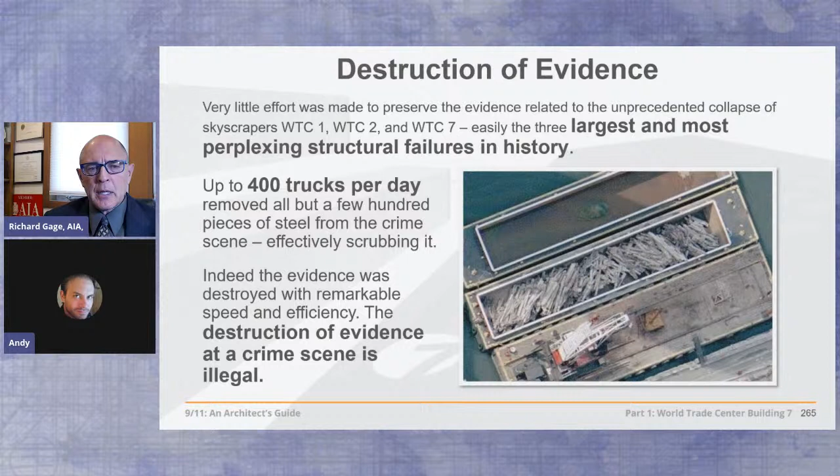This is the illegal destruction of evidence in a crime scene, prompting Bill Manning, editor-in-chief of Fire Engineering magazine, to cry out: crucial evidence that could answer many questions is on the slow boat to China, showing an astounding ignorance of government officials to the value of a thorough scientific investigation. The destruction and removal of evidence must stop immediately. But it didn't, prompting experts like Danny Jowenko to offer their own solicited opinion on the spot.

Danny Jowenko is the expert on this in Europe. What did he say?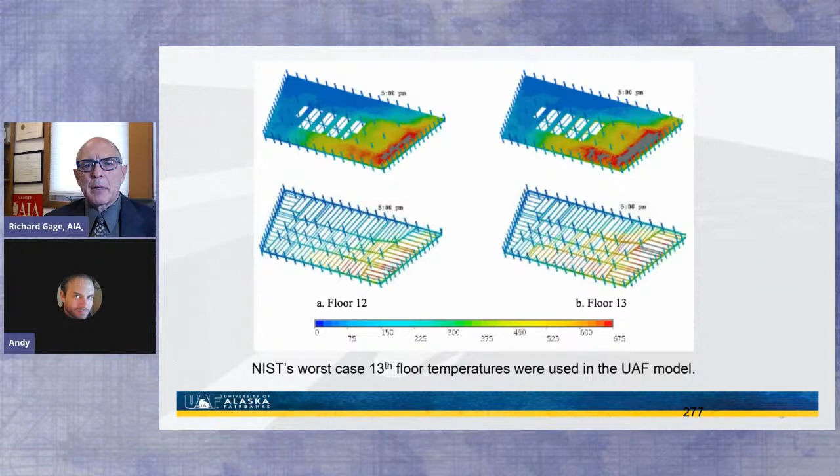And we have hired one of the top forensic structural engineers in the country, Professor Leroy Hulsey of the University of Alaska at Fairbanks, and his team of PhD students.

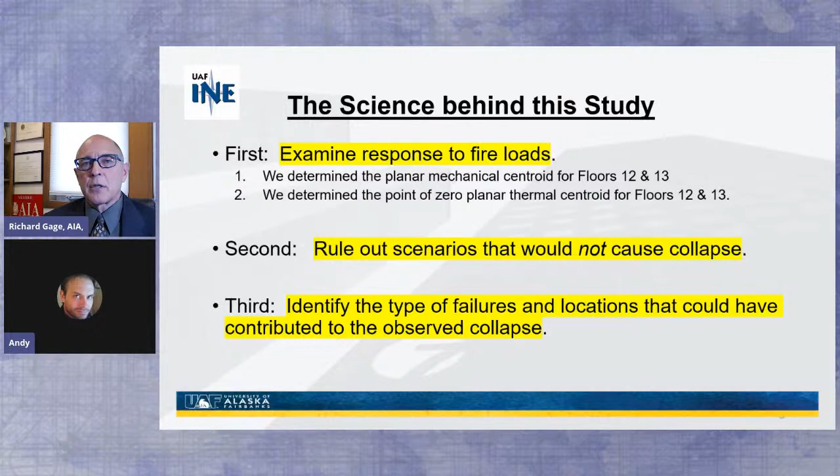They engaged in a 4-year, $300,000 study of what really happened to this building. So they looked carefully at the problem, because no other tall steel frame building had ever failed due to fire. They had to ensure public safety, that the failure mechanism of the structure be understood. So they examined the response of the building to the fire loads that NIST used. They ruled out scenarios that would not cause the collapse, and they tried to identify the types of failures and locations that could have contributed to the observed collapse.

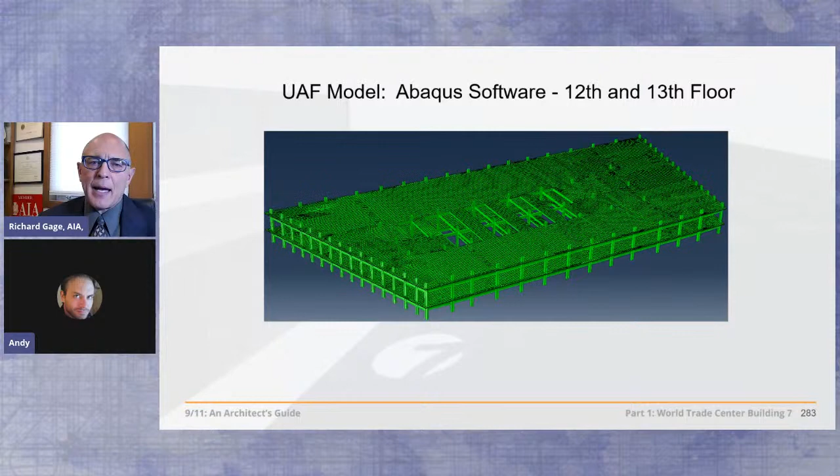They used the same input data as made available by NIST. They had 3 approaches: to simulate the local structural responses, to examine the NIST collapse initiation hypothesis, and to simulate numerous failure scenarios. This data was put into AutoCAD first, and then the Abaqus software was compared head-to-head with the SAP 2000 software models. They focused on the area of concern that NIST had, with the same pushing of the girder off of its seat. They found, by the way, it couldn't be pushed off because it was trapped by these side plates. After this beam heats up and expands a little bit, it becomes trapped.

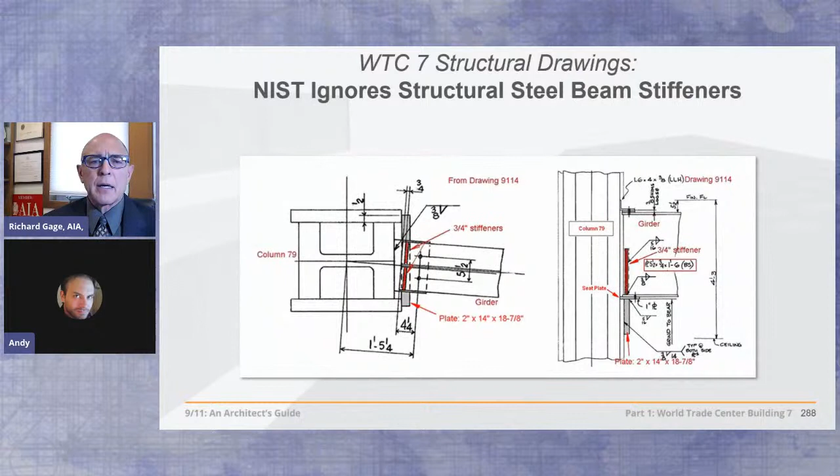They found that NIST lied about the 30 shear studs not being there. The shop drawings show that they were indeed there. They found NIST lied about the stiffeners that we talked about. They lied about the amount of required force to break the girder connections below the 12th floor that we talked about.

They lied about the direction of the movement of the structural forms, because in their computer model, NIST made the exterior wall infinitely stiff, so everything had to move inward. But the exterior wall is not infinitely stiff. In fact, it's a lot less stiff than the interior of the structure. So actually it moved out.

So the entire scenario that NIST painted is fraudulent from beginning to end, but that claim is not just made, it's demonstrated by the University of Alaska. Their findings show that NIST overestimated the wall rigidity. The movements were from west to east at column 79, not east to west, and the movement at the column seat was in the opposite direction.

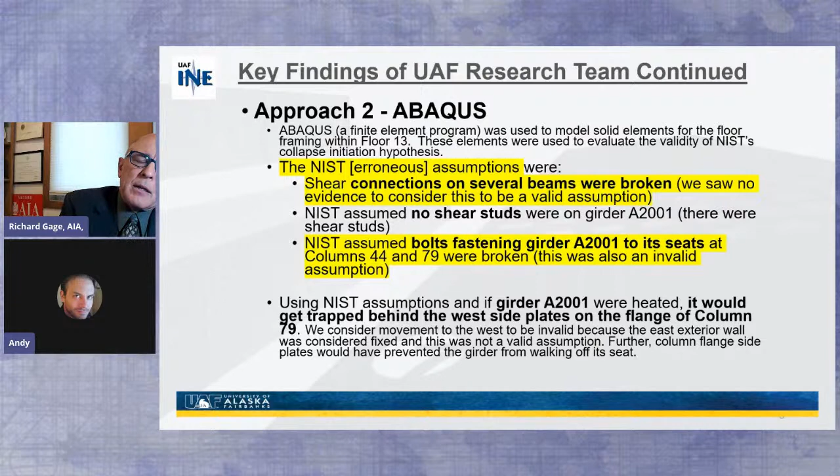They found that NIST's assumptions were that the shear connections on several beams were broken. They were not. The bolts fastening the girder to its seat were broken, but they found that they were not. They found that columns 79, 80, and 81 did not fail, as NIST claimed would have failed.

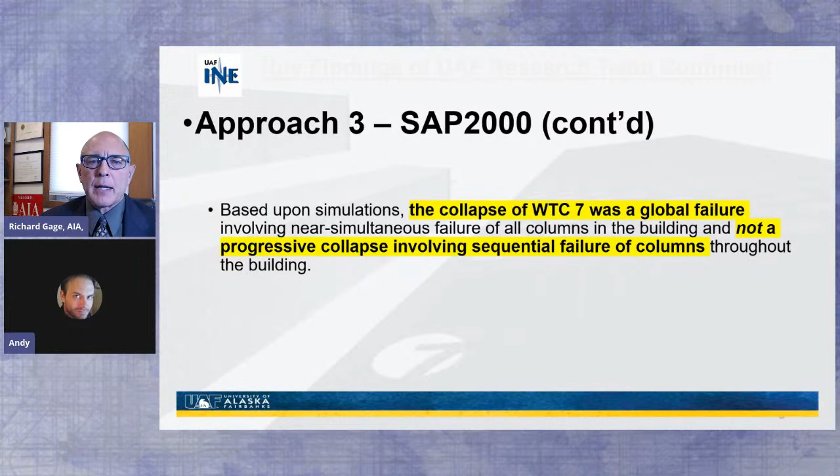So they find that fire did not cause the collapse of Building 7. The temperature was not high enough to cause weakening of the steel framing. Thermal expansion did not result in a loss of support for the beams and the girders. And WTC7 did not experience a progressive collapse, but a global collapse caused by the near simultaneous failure of all of its columns within a second of each other or so.

Why do they stop it? They had years to create this model. Well, it begins to tip over. It would look nothing like the Building 7 collapse. They can't even get their own computer model falsified enough to appear similar to the video of the collapse.

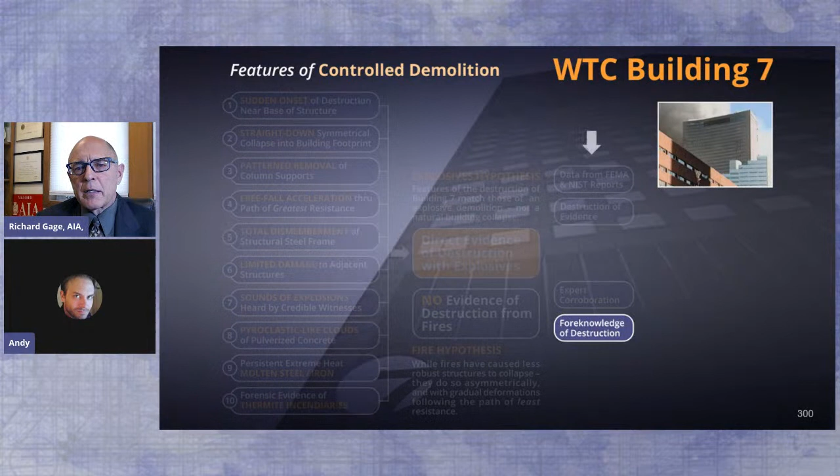But now it gets even more interesting because we look at foreknowledge of the destruction, because if this was set up as a controlled demolition, people would know, like this person, an engineer, who's asked by the chief, if we allow it to burn, could we anticipate a collapse and how soon? Well, the engineer said 5 hours. In its current state, you have about 5 hours.

What? A steel frame skyscraper has never collapsed due to fire alone, and now you're predicting that this one's going to collapse in 5 hours? And it does? This prediction can only be made with foreknowledge of the building. Foreknowledge, which we're going to look at some more evidence of as we look at these construction workers.

Mysterious construction workers walking away from Building 7, hearing an explosion over their shoulder, looking back at the building, and then looking straight into the CNN camera and saying this.

You hear that? Keep your eye on that building. It'll be coming down. The building is about to blow up. Move it back. All right, guys? Sorry, we are walking back. There's a building about to blow up. Flame and debris coming down.

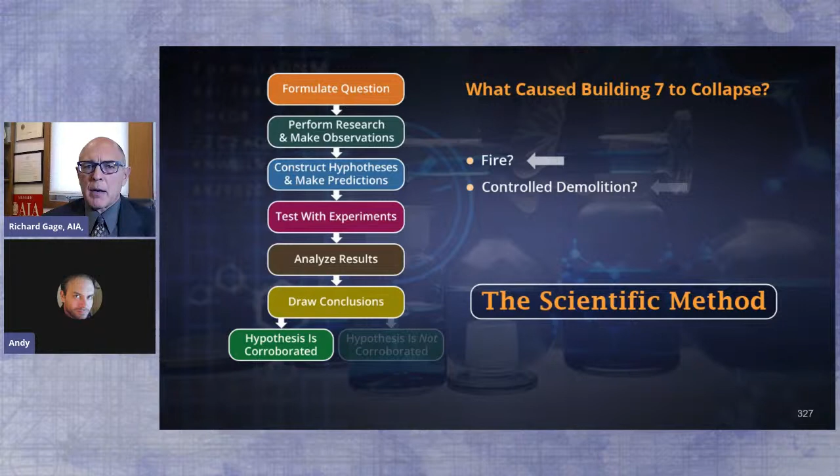Well, what have we learned today using the scientific method? Is the hypothesis of fire corroborated by the evidence, or is controlled demolition corroborated by the evidence? Have we shown 10 key characteristic and many uncharacteristic features of controlled demolition? Is that, to you, direct evidence of destruction with explosives? Can fire create any one of those features, let alone all of them? Is there additional circumstantial corroborative testimony that proves controlled demolition? Well, we want to know the answer from you.

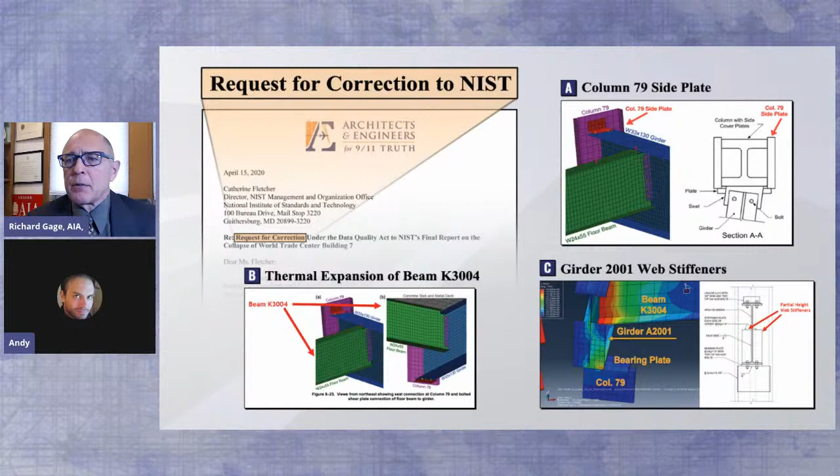We're getting ready to sue NIST because they have not responded to our appeal to their denial of our request for correction. We're putting the screws to them, so you can help us. We went through all this material and put it into a legal 100-page request for correction, which they have yet to respond to adequately.

We also want you to know that you can make an appointment with your congressperson. How does that work, Andy? We're actually going to go and give the presentation to your congressman for you. Isn't that right? That's right.

The one good thing about this terrible ordeal we've been through since 2020 is that Congress now will meet more people over the phone, so we have to take advantage of that. The way you do that is figure out first who your congressman is. Some people don't know. Then go to their own congressional page and find the box for setting up a meeting request. All of them have that in some form or another.

You make a request and say you want to talk about the Bobby McIlvaine Act, which we'll talk about in a moment. We're also going to be doing some action regarding the request for correction that the clock is still ticking on NIST to give an adequate response to. So all of these things need to be discussed with Congress, but we're in our own districts, and there's a lot of congressmen out there. They care mostly about their constituents and staying elected, so that's why you're so important.

So you make that request. If you need any help doing it or have any questions, you can write to Congress at AE911truth.org, we'll help you do it. We keep track of it and go on the meeting with you. Most of the time, Richard is there and makes the presentation. You can participate and ask questions or make requests of your staffer or congressman when they're on the phone as well. It's great action, and it's actually not that hard to do, just a little bit of effort. So please consider doing it.

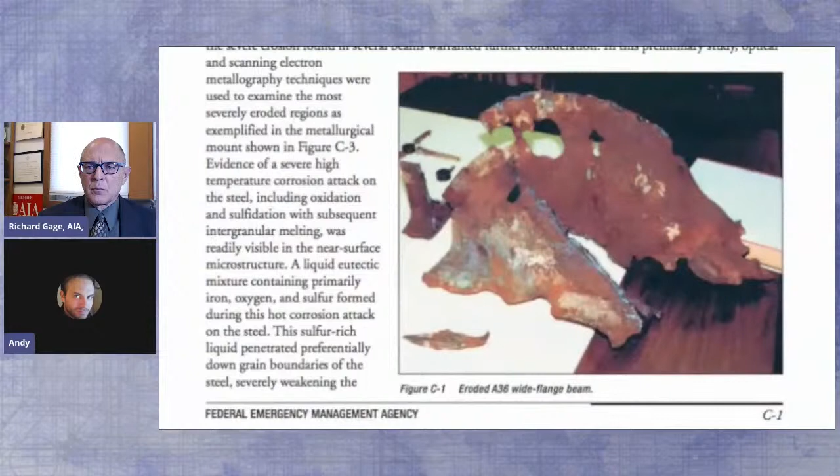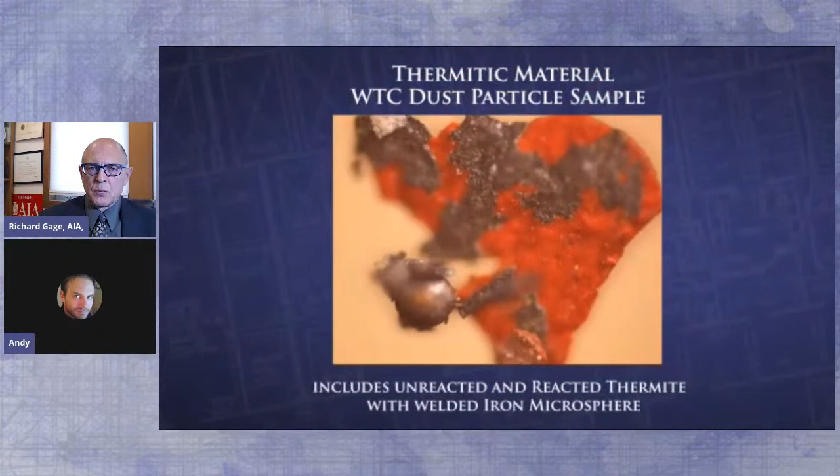The center of the core, the penthouse area, starts to move first, and then the building follows along with it. NIST excluded the documents from FEMA in Appendix C that documented the evidence of melting steel. In an office fire, you cannot generate enough heat to melt steel. There were these iron microspheres present in all of the dust samples. They needed to have been formed in extremely high temperatures. All the characteristics of the microspheres, along with what I see in the attack of the beams that were actually found, tell me that thermite was involved. In the dust, what we have found is a modern version of thermite, which we call nanothermite. NIST concedes that they found no evidence for explosives. So then we asked them, well, did you look? And they said, no, we did not look for explosives or residues of explosives. In fact, the evidence is overwhelming that these red-gray chips are very high-temperature incendiaries. We have watched as scientific integrity has been undermined and scientific research politicized in an effort to advance predetermined ideological agendas. If this is a crime - and I think everybody agrees it's a crime - evidence was removed from the scene of the crime. You can't do science when you are deprived of the evidence and when your hypothesis is the least likely instead of the most likely, when the most likely hypothesis, in the case of Building 7, wasn't even mentioned. This is not science.